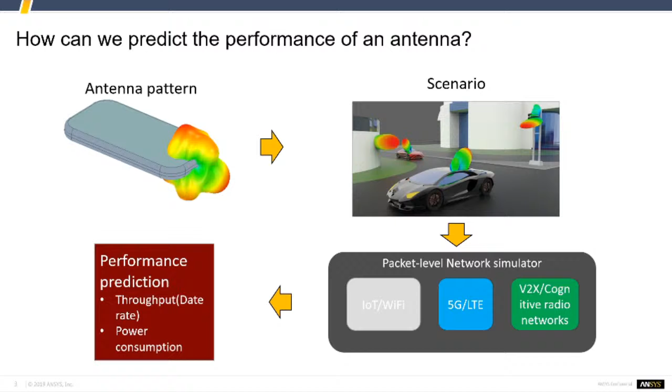Here is our solution by using our network simulator. First, you get your antenna pattern from your own design or off-the-shelf antenna. Second, you define the scenario—it can be indoor, outdoor, highway, or urban area. Third, you choose which type of simulator—IoT, Wi-Fi, 5G, LTE, or car-to-car communication. And they will produce performance prediction, which can be throughput, power consumption, and etc.

Here is today's scenario: a single cell base station and one user. Case 1, we use an isotropic antenna—everything is very ideal. Case 2, we use a realistic antenna pattern from ANSYS HFSS, and we simulate more detail about the PCB board and the material of the antenna, etc. We also put a human head and hand near the cell phone.

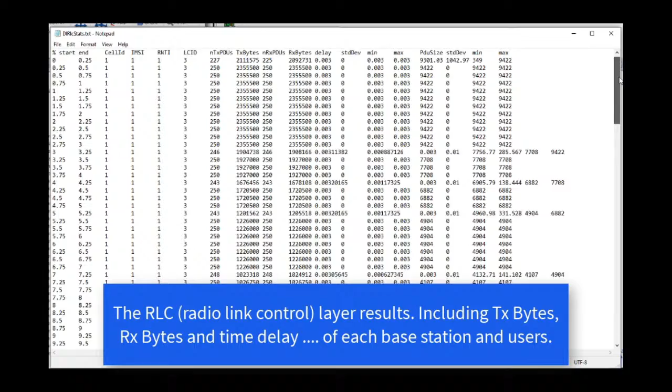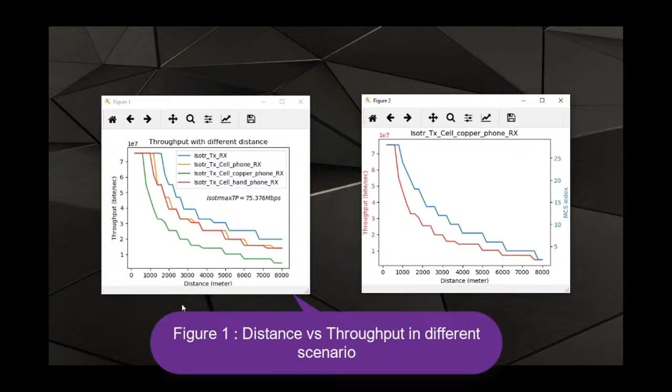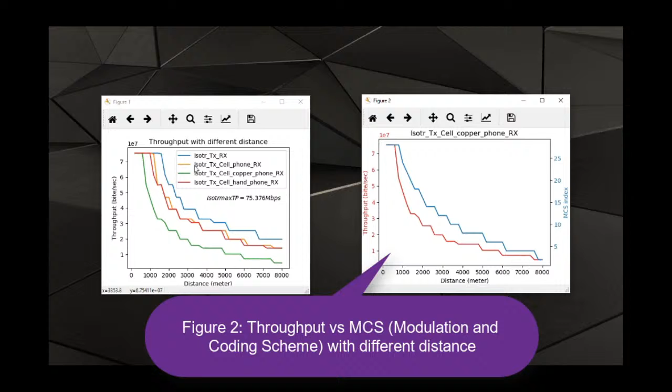Here is a key value of our network simulator. Figure 1 is distance versus throughput in different scenarios, showing each type of antenna's data rate in different cases, so we can compare which one is better easily. Figure 2 is throughput vs MCS, so we can know how much antenna gain is needed to achieve a higher modulation order to get a higher data rate. With these two figures, we can know if this antenna is good enough for our product or not. If it's not, we have a better understanding of how to improve the antenna to reach our goal.

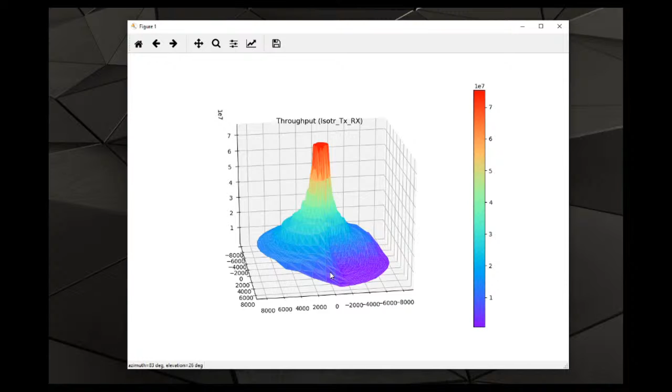In part 2, we are going to talk about Wi-Fi system data rate prediction and power consumption. In this scenario, we will have an AP, which can be a router, set up in the center, and the height will be like 0.5 meter. We have a UE, which in this scenario will be a cell phone, and each second the cell phone will step 1 meter away from the router. In this scenario we will try to reach maximum throughput, using Wi-Fi protocol IEEE 802.11g.

Here you can see a comparison with two kinds of antenna. One is isotropic antenna, which is very ideal—it's like a ball, and it will be 0 dB. The other one is our antenna from HFSS. You can see our antenna has better performance, so even as they get farther away, they still have better throughput—they can still reach like 27.

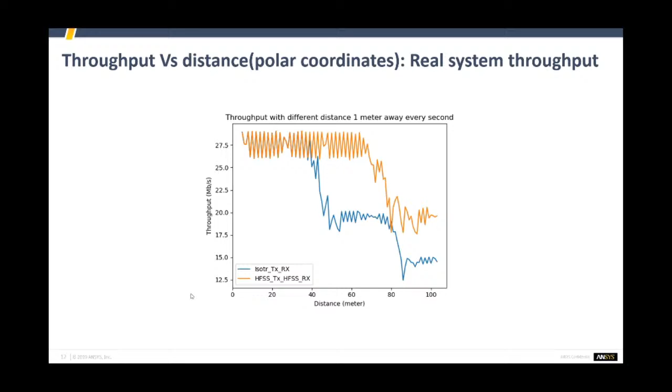In this scenario we try to use a single antenna case. The second one, we are curious about power consumption. It's still the same scenario, but the UE has different power levels, and they try to reach a certain throughput while trying to save power as much as they can. The HFSS antenna still has better performance, but it goes down to reach the same level while saving more power.

To find the best antenna to fit your product, we hope our network simulator can give some valuable insight.

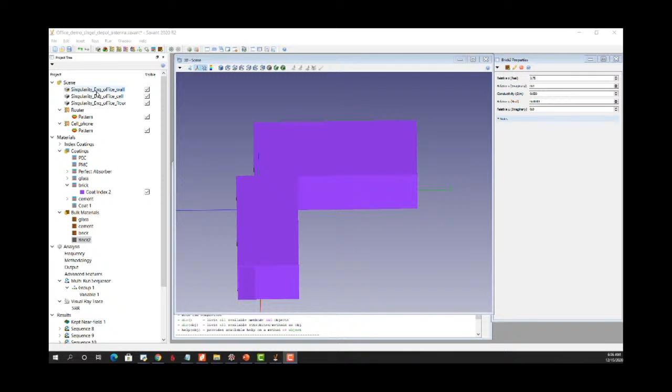We are going to use the ANSYS Savant tool, a ray tracing simulation tool, and we will have a quick demo. First I will show how to use it, and second I will explain more about how to generate a map-based channel model.

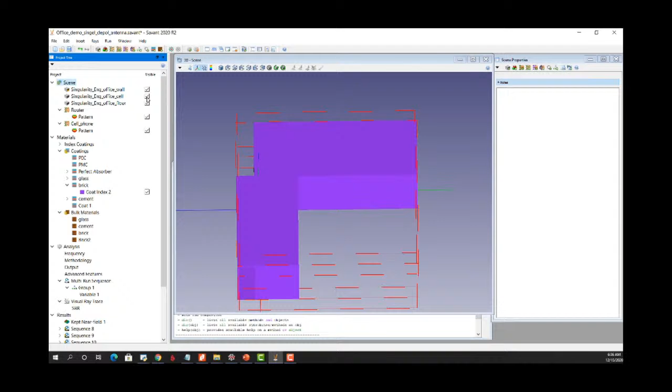You can see here, this is our office, how it looks exactly. It has a wall and a floor, and I put 2 antennas, 1 router and 1 receiver. Let me take out the ceiling so it's easier to take a look.

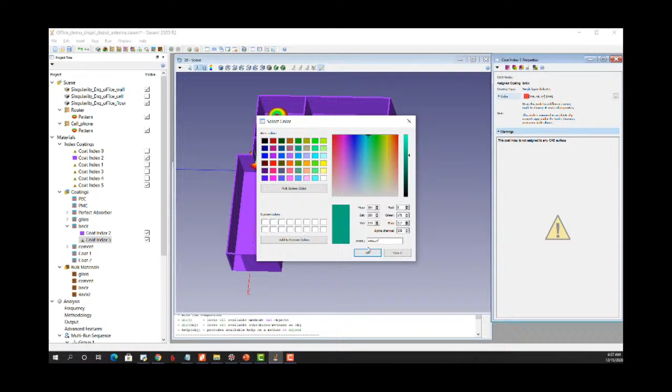Here you can set a different material, and also you can put a different color, add an index, so it's easy to tell things look different. Let me put maybe another color, and it will still be brick. You can click, so now it will be easier to tell.

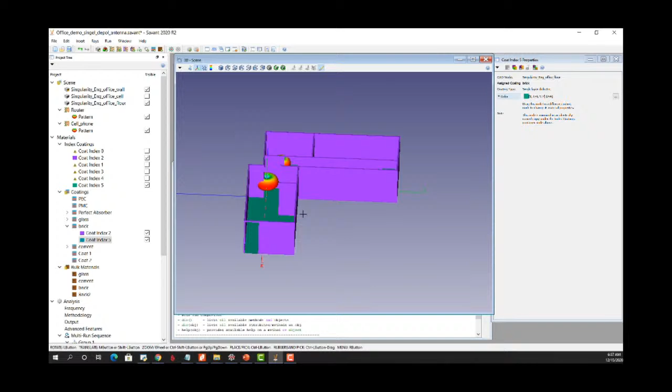To try to keep it simple, for this one I use a dipole antenna for both the router and the cell phone. This is our cell phone. We set up the router at 0.5 meters because that's like our table's height.

This is the cell phone. We assume that the person holding it has it at about 1 meter height. You can also set up different materials, like PEC (perfect electric conductor), and also a perfect absorber.

Here it's the analysis, and you can have different modes: one is far field, another is near field. Today we choose antenna-to-antenna coupling, and we set the router as our transmitter and the cell phone as our receiver, with this being the cell phone antenna. They have different ways to run.

So we set up the frequency at 2.4 GHz, and how many bounces. Because this is ray tracing technology, this defines the density of the ray and how many bounces you want. Since I have a wall, I have bouncing, and this is the output file—we need the full field and touchstone file.

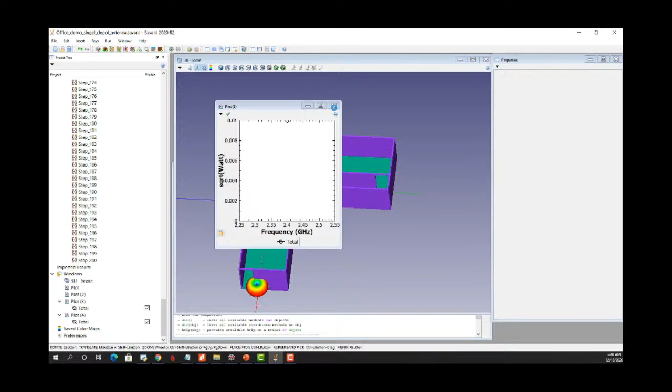This shows the loss at each point, and we will take this result and process it to put inside our network simulator, where we will predict the data rate and power consumption.

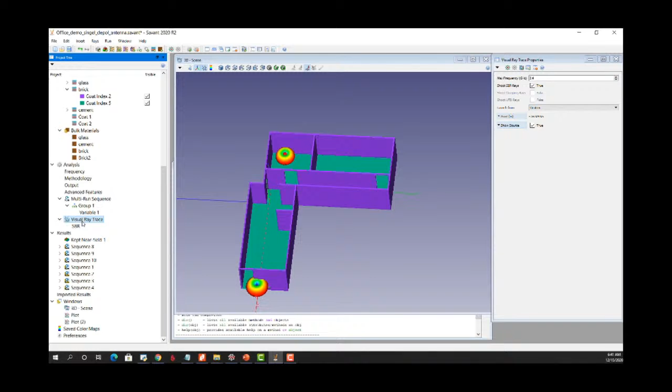This tool also has another function—you see here, this is like a visual ray trace. If you set up a range from the transmitter, in this case our router, you can see it shooting rays, and you can set how many bounces you want.

Maybe your benchmark is 2, so this will just be 2 bounces, and if you set up more, you can see more bouncing. You can also see the density, length, and statistics of how many bounces they have.

So we use Savant. After running, we can take the file. Then you can go to the sequence and find that every simulation result is stored here.

You can open it, and it will record the frequency and the real and imaginary parts, and all the path loss will be stored here.

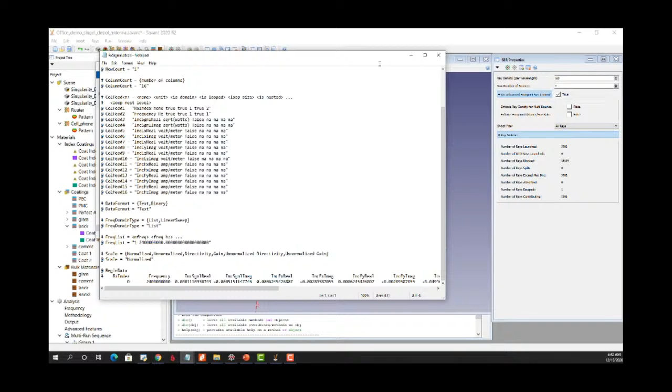You need to go through different files, so we wrote a Python script to read all the files and create a table, which we feed into our network simulator. Then we can run the simulation and get the data rate and power consumption.

Okay, so here is our Python script. This will help us for two purposes. First, it helps us generate the multi-sequence simulations I need to run, so we don't need to type them one by one.

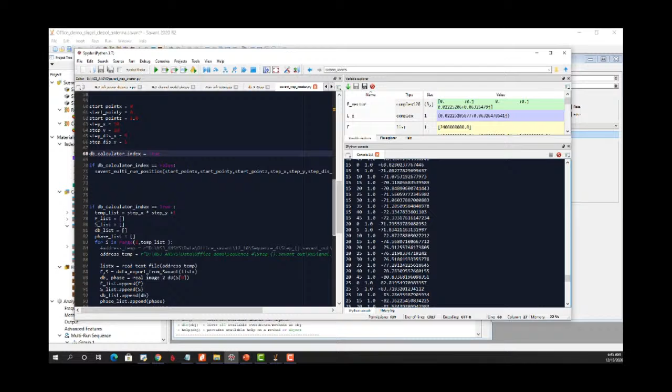After running the simulation, we use a Python script to read and calculate the path loss. Here you can see X, Y, Z coordinates, and this will be the dB loss for each location. If you run multiple locations, there will be a map, and this will be our map-based channel model.

After we use Savant to run each location's ray tracing simulation to get the path loss, we can use a Python script to get that data and do post-processing to get each location's path loss in dB. They become part of the information for our map-based channel model, and we feed that information into our network simulator.

After that, we can predict data rate and power consumption. Here is one scenario, where we have one user and one AP, which will be a router in the center at a height of 0.5 meters, and another receiver device, a cell phone, which will move around at a height of 1 meter.

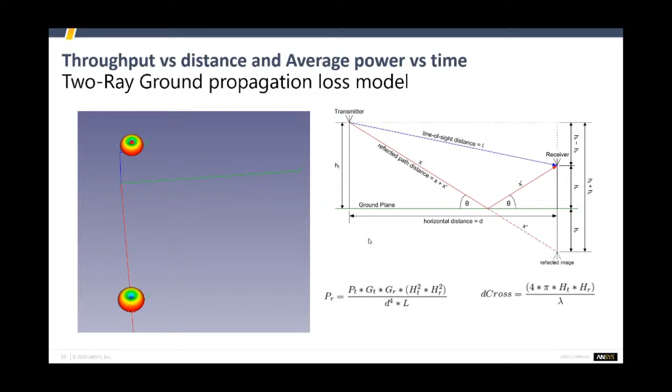Because this is free space, we compare it with the two-ray ground propagation loss model, and the numbers are pretty close. Here is the expression for the two-ray ground propagation loss model. It's very good for free space with just line of sight and one bounce from the ground.

Here is the simulation result. In this scenario we have two types of radiation patterns: one like a cell phone antenna such as those used in LTE, and also a Wi-Fi antenna. It's the same cell phone, but we put a copper plate next to it to reduce the antenna gain.

With the copper plate, the throughput shows a significant drop at 75 meters, but without the copper plate, the drop happens around 110 to almost 120 meters. So you can see almost a 40 meter improvement, performing better than the other.

Here you can also see the power. If the antenna is next to a copper plate, it needs to use more power to transmit. This area represents the energy used, since this axis is time and this is power, so the area under the curve is the total energy used.

Without the copper or any metal plate, the antenna actually has better performance. This is the same as our common sense would suggest.

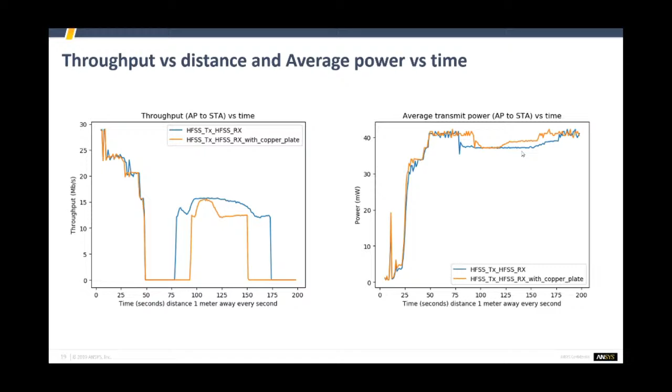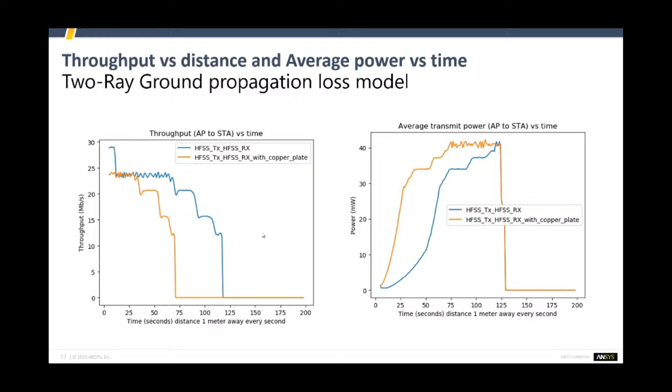And we see here is the power, and it kind of makes sense. The blue one still uses a little less, but there isn't much difference. But you can also compare these two. You see here, in general, without any walls, they can use less power and have better performance. But after we put our office's real geometry and environment setup inside, they need to spend more power to get performance that's not even better than before.

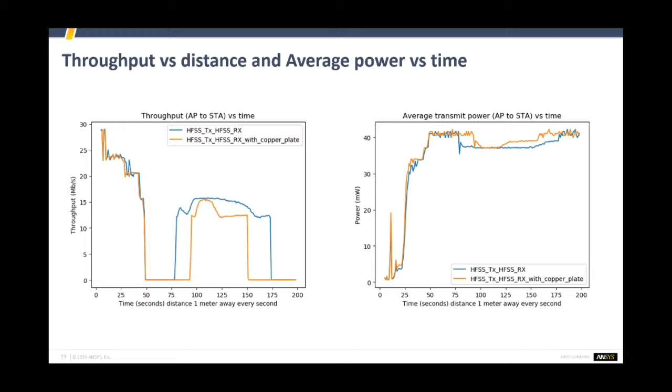Yeah, and so we think if it goes to 5G, especially high frequency, real-world information will provide more hidden variable information inside. Yeah. Okay.

And here is just a summary of our network simulator, and also an introduction to some of the input parameters you can input in the network simulator. There are still many more, but I just picked a few that are more common and useful. First, you can input your antenna radiation pattern. This one can come from a simulation tool like HFSS, or you can use your test result.

Second, you can decide what kind of protocol you are going to use. You can use Wi-Fi, LTE, or millimeter wave. The third one is the channel model. You can use ray tracing, using Savant to get a ray tracing map-based channel model with real-world geometry information, or you can use a channel model like two-ray or log or others. We have multiple different channel models with math equations and probability.

Next is the channel number. It means which frequency you use and how many frequency bands you are using. In the LTE and Wi-Fi protocols, they have a specific table to tell the user which channel number means which frequency, how many frequency bands you can use, and how much frequency bandwidth you can use.